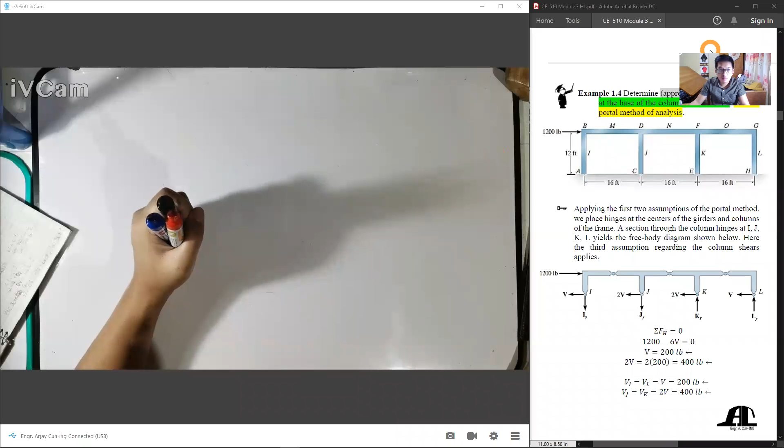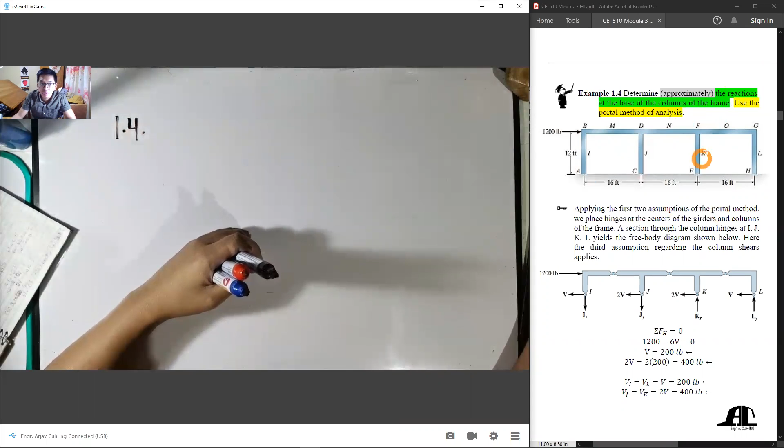So module 3 pa rin tayo. Okay, so this time sasagutan natin si example 1.4. Titignan nyo class, same, hindi, this time ang kukunin lang natin yung reactions nung given frame, yung portal frame method. So again, dating gawin, ang first step natin lagi dito is yung column shear.

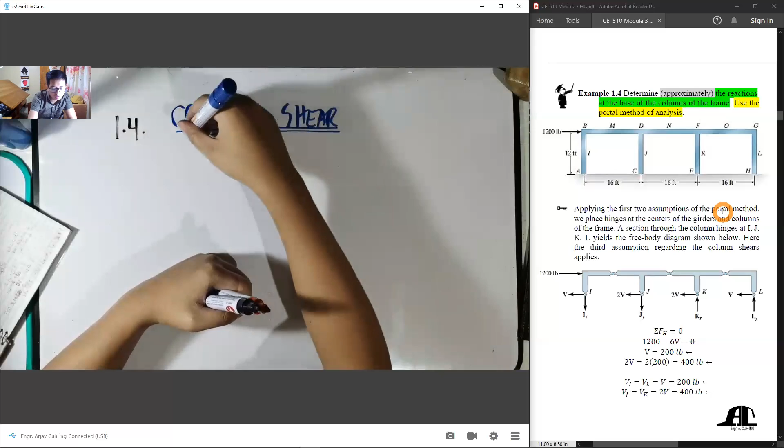So column shear, para mapalabas natin yung shear, kailangan natin ng cut. Ay hindi, ang cutting natin this time ay dito. Hindi, anywhere naman actually, kasi di ba ang habol lang naman natin pwedeng dyan, pwedeng dito. Ang habol natin dito is yung shear. Pero dito, this time, sa shortcut, more or less, cut na lang natin sa gitna.

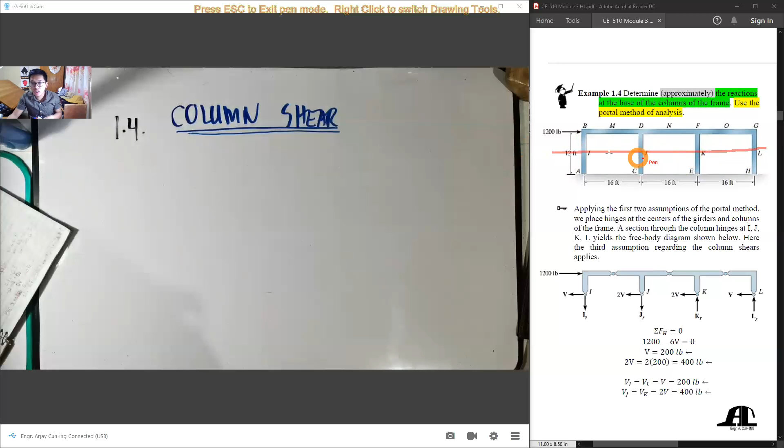Kumbaga kung saan yung mga internal hinge natin. So itsura ng ating working structure pag nag-cut tayo dyan. More or less, parang ganito. Yan, so meron tayong ganito. Dito yung internal hinge natin. Yan yung mga internal hinge natin. So kukunin natin yung shears dyan.

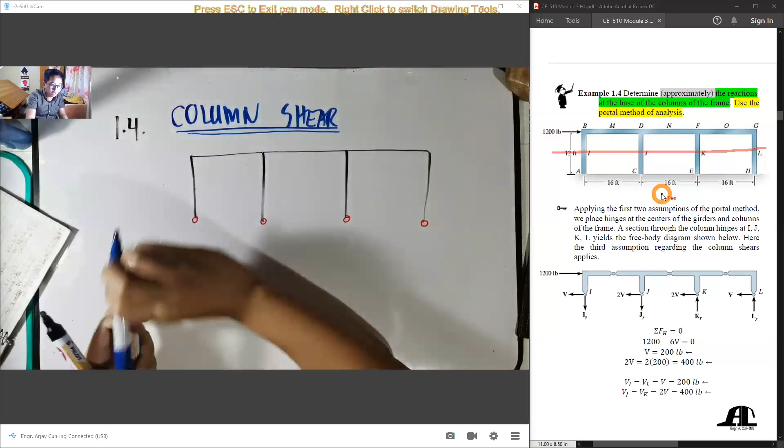So open muna natin yung external load. Ang external load natin, meron tayong 1200 pounds. Kung titingnan nyo, ilagay ko yung ating notation. So meron tayong B dito. Ito yung D, F, tapos G. Ito naman, meron tayong I, J, K, L.

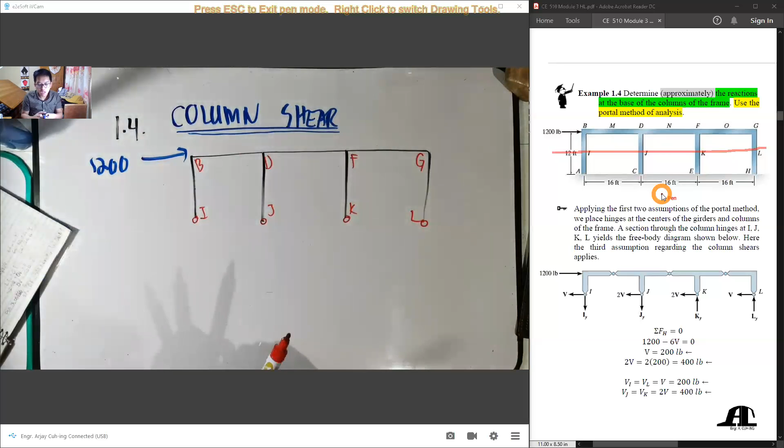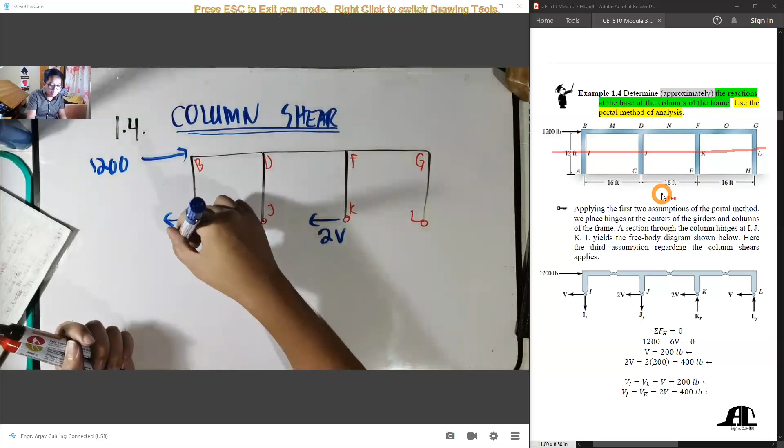Di ba yung first assumption natin, shear. So kailangan natin ilagay yung shear. Pag kinat natin yun, meron tayong makukuhang shear. Tapos yung mga value ng shear natin, pag interior columns, yung shear niya dito, 2V. Lahat ng interior columns may shear na 2V. Yung mga exterior columns naman, meron lang siyang V. Yan ang working structure natin.

Para makuha natin yung value ng V, magsasummation of forces horizontal tayo, equal to 0, lahat ang to the right positive. Apply natin yung formula. Meron tayong to the right na 1200, so positive siya. Minus, meron 2, 4, 5, 6. 6V is equal to 0. So may makuha tayong V: V is equal to 200 pounds.

Since nakuha natin yung V, pwede na rin natin makuha kung ano yung mga V dito. Kung titignan natin, meron tayong shear nung I. Yung shear nung I ay equal sa shear ng L, equal sa V, equal to 200 pounds to the left. Meron rin tayong shear nung J, equal sa shear ng K, equal sa 2V, equal sa 2 times yung 200, so 400 pounds to the left. Yun yung first step natin.

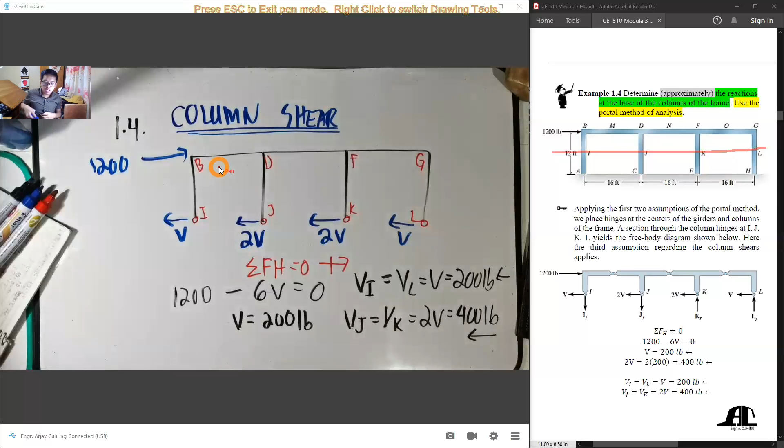Nakuha na natin yung column shear. So next step natin, kailangan natin free body diagram analysis. Lalagay lang natin yung mga sagot natin. Yung mga exterior, meron tayong 200. Yung mga interior, meron tayong 400. Okay, erase ko lang.

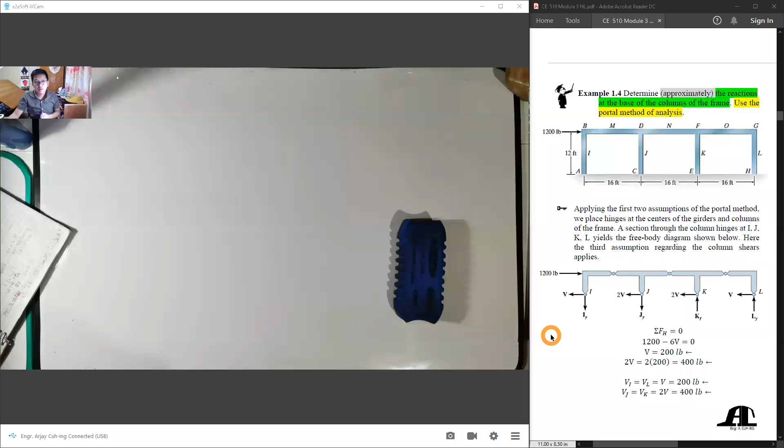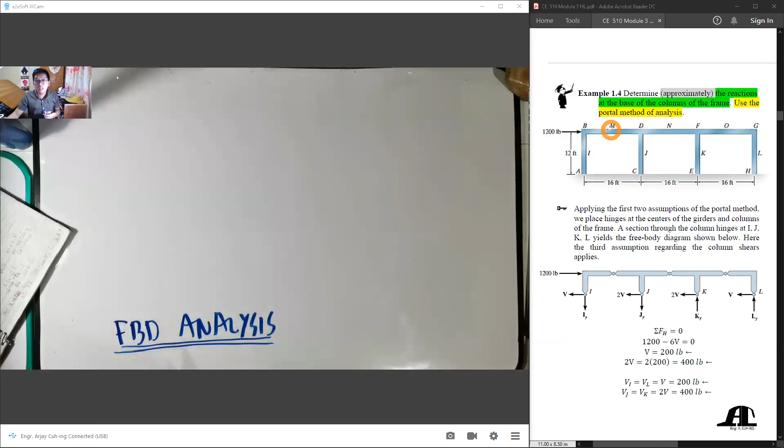Tuloy natin. So after natin makuha yung column shears, ang next step natin ay yung tinatawag natin free body diagram analysis. Itong free body diagram analysis, chop-chopin natin para makuha natin yung mga internal forces natin. Ang gagamitin natin is yung shortcut, kasi mas maiksi siya. Ang gagawin kasi pag shortcut, gamitin natin yung internal hinges.

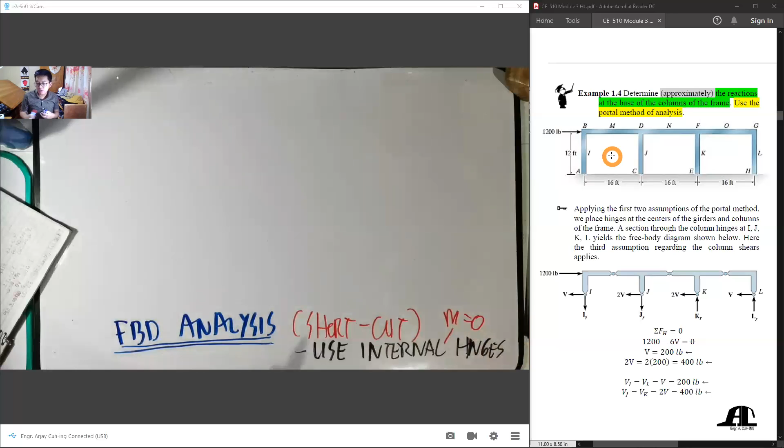Internal hinges. Ano bang special sa internal hinge? Pag internal hinge kasi, pag kinat mo, yung moment doon is equal to 0. Diba yan yung special pag internal hinge. I-drawing muna natin yan. Titignan nyo, meron tayong 1 story, tas 3 panels, 3 bays.

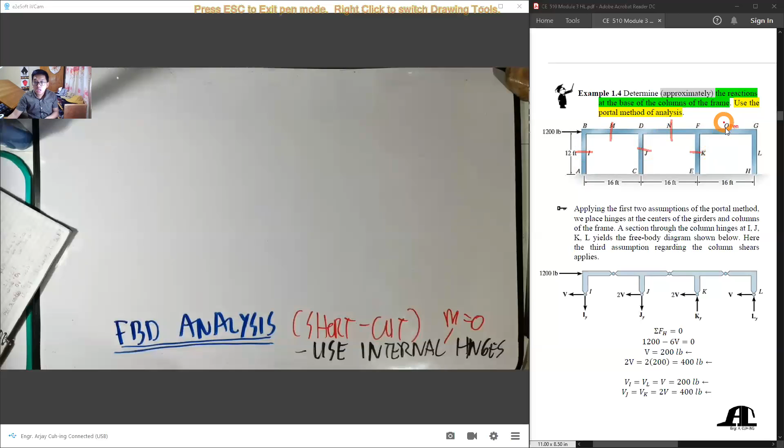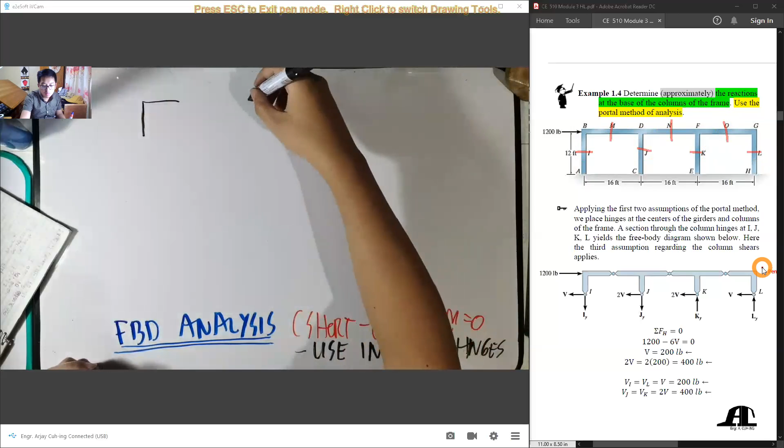Ang cutting natin dito ay i-cut natin dun sa internal hinge. Kung titignan nyo, cut natin doon, cut natin dito, cut, cut, cut, cut. Parang paghihiwalayin natin midway. Dito, meron tayong paganyan. Tapos meron tayong dito rin. Isa pa. Tapos meron tayong ganyan. Tapos i-cut rin natin dito. So may cut tayong ganyan.

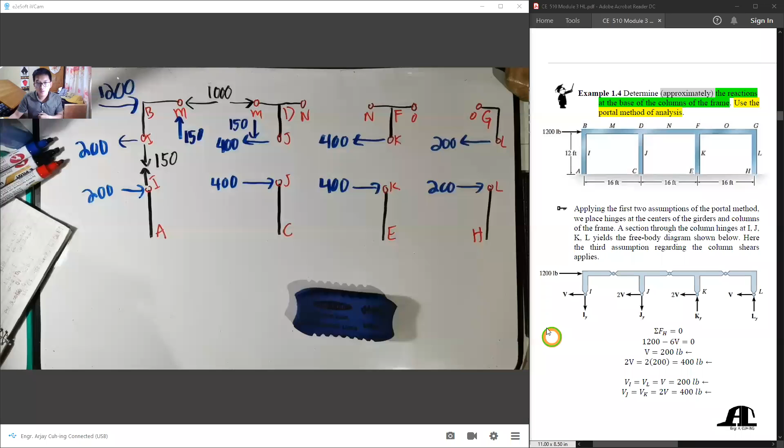So nagtapos na tayo dito, class. Kung titignan nyo, ang pwede nating next na i-analyze, class, is dito na tayo sa FBD ni D. Okay, erase ko lang to, class, para may space ulit tayo. So tuloy lang natin, class. So after nyo kung titignan nyo, class, so move na tayo dito. So ang next na i-analyze natin, class, is yung free body diagram ni D.

Okay, kung titignan nyo, class, ito na yung working structure natin. So ano yung mga unknowns, class? Meron na tayong shear doon, class, meron pa tayong axial. Okay, so yung dito, class, meron tayong axial, tapos meron rin tayong shear. Yan, gulo ba?

Okay, so ilagay lang natin, class, kung ano yung assumptions natin. Ito, class, i-assume natin na pababa. So ito, technically, class, yeah. Assume natin to the left. So ito, class, assume natin to the right.

Okay, so unahin natin class again. Working structure natin class again, yung FBD ni D. Okay, meron tayong 1, 2, 3 na unknown. So technically, gagamitin ulit natin kasi yung tatlong equilibrium equations. Unahin natin class, mag-moment na tayo sa n is equal to 0, ano clockwise, positive.

Okay, so ano yung forces class? Mag-create na mo with respect to n. Titignan natin class, meron lang tayo ng 150, no? So yung 150 na to class, times yung lever arm niya class is 8. Hindi pala 8 class kasi 8 plus, isa pang 8 plus 16. Okay, so 150 class times 16.

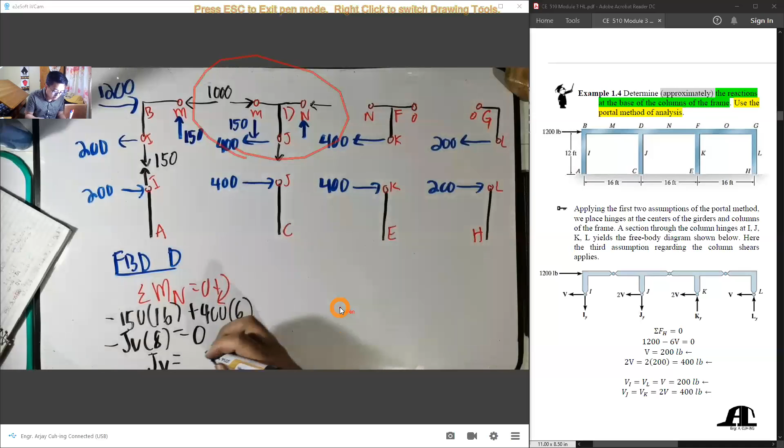Okay, so yung JV plus, pag kinalculate natin yung class is equal to 0. Titignan natin, 0 pala yun. So huwag na natin ilagay, alisin na natin siya kasi 0 naman siya.

Tuloy-tuloy lang tayo. Magsa-summation of forces vertical tayo kasi is equal to 0, lahat ng pataas positive. Kung titignan nyo, meron lang tayong 150, pababa siya, so negative. Tapos plus yung N vertical is equal to 0. Makuha natin N vertical is equal to 150 pounds. Tama yung assumption natin pataas.

Tapos summation of forces horizontal tayo is equal to 0 and to the right positive. Meron tayong 1,000 na to the right, so positive siya. Minus yung 400, minus yung N horizontal is equal to 0. So yung N horizontal natin is equal to 600 pounds. Tama yung assumption natin na to the left.

Ilagay na natin yung mga sagot natin. Meron tayong NV na 150, ito is 150. Tapos meron tayong 600, ito is 600.

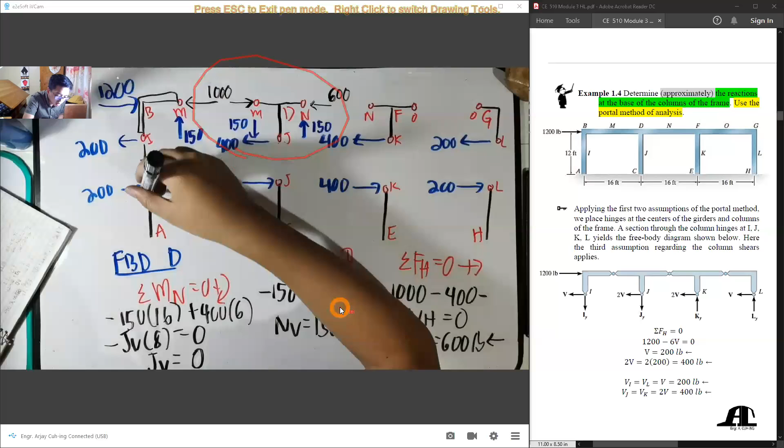Para mas ma-imagine natin, tabaan ko na lang to. Ganda palang ganito, para mas makita nyo yung structure natin. Nag-improve naman. Okay, ilipat natin yung mga sagot natin.

So meron tayong to the left na 600, meron tayong to the right na 600. Meron tayong upward na 150, so pag inipat natin magiging downward siya na 150. Tapos, yun na yun.

So gagalaw lang ulit tayo. Ang next na i-analyze natin is ito. I-erase ko lang ulit. Tuloy natin yung, ang i-analyze natin ngayon si FBD ni F.

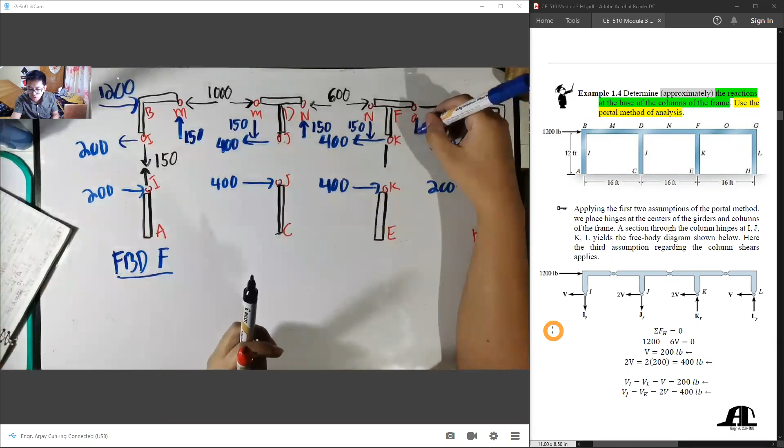Dating gawin tayo. Kung titignan natin, meron tayong tatlong unknown. Supposedly yung axial dito, tapos yung axial dun, tapos yung shear sa O. Maglagay tayo ng ating assumptions. Ito i-assume natin pa ganyan, ito i-assume natin pa ganito, ito i-assume natin downward. Okay, 1, 2, 3.

Dating gawin, summation of moments natin dun muna sa O is equal to 0, lahat ng clockwise positive. Yung forces na mag-create ng moment with respect to O, meron tayo ng 400 times yung lever arm na 6, minus yung 150 times lever arm na 16, minus yung kinukuha natin, so kukunin natin dito yung K vertical times yung 8 is equal to 0.

Makukuha natin yung K vertical equal to 0 rin siya. Titignan nyo kasi, tanggalin na natin siya kasi 0 naman siya.

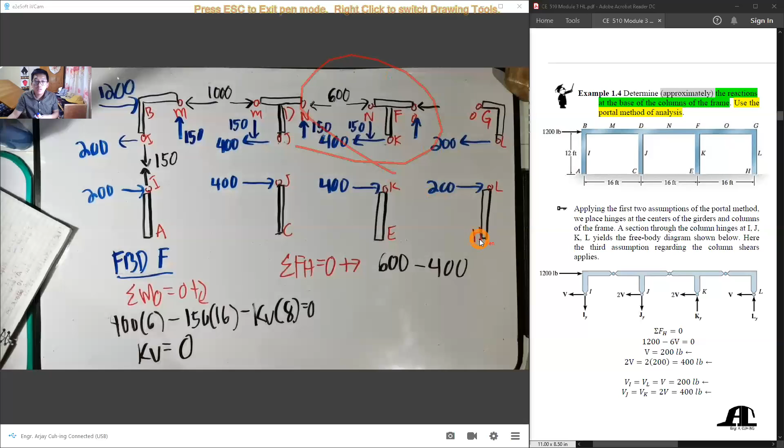Pounds. So may assumption natin to the left. Lastly, summation of forces vertical is equal to 0, pataas positive. Yung working structure natin, meron lang tayong pababang 150, so negative, plus yung upward natin na O vertical is equal to 0. Makuha natin yung O vertical is equal to 150 pounds. Tama yung assumption natin pataas.

Lagyan natin yung mga sagot natin. Ito still 150 siya, tapos yung axial natin naging 200. Lipat natin yung mga sagot natin, meron tayong to the left na 200, so dapat pa right na siya. Meron tayong upward na 150, so dito meron tayong downward na 150.

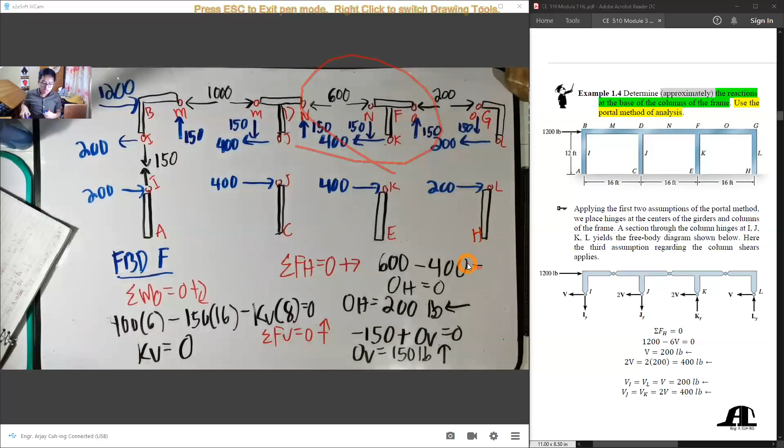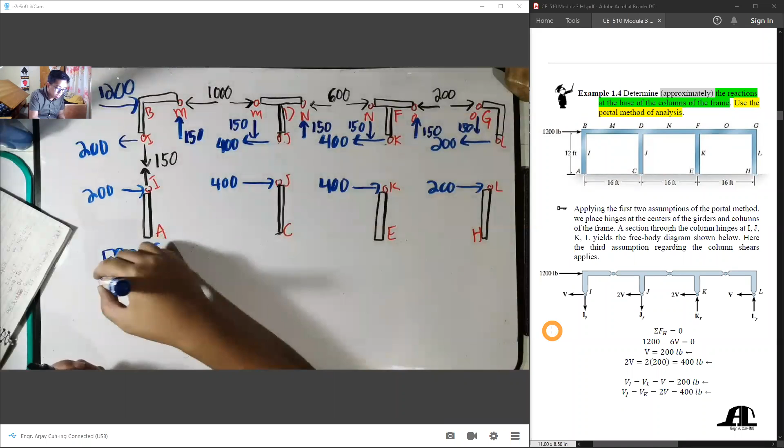Okay, so ganun, tuloy lang natin. Next up i-analyze natin FBD ng G. So FBD ng G, i-erase ko lang ulit. Dito na tayo, free body diagram ng G. Ang FBD ng G, kung titignan yung isa lang yung kukunin natin dito, kukunin lang natin kung ano yung axial dito sa L.

Kung titignan nyo, ang gagawin lang natin dito, ang summation of forces vertical is equal to 0, pataas positive. Meron lang tayo plus 150 na pababa, so negative, plus yung, ito i-assume na natin sa pataas siya. L vertical is equal to 0, so L vertical is equal to 150 pounds. Tama yung assumption natin pataas. Next, dito na tayo sa mga columns natin sa baba kasi nakuha na natin lahat ng forces dun. Ilagay mo natin yung sagot, ito is equal to 150.

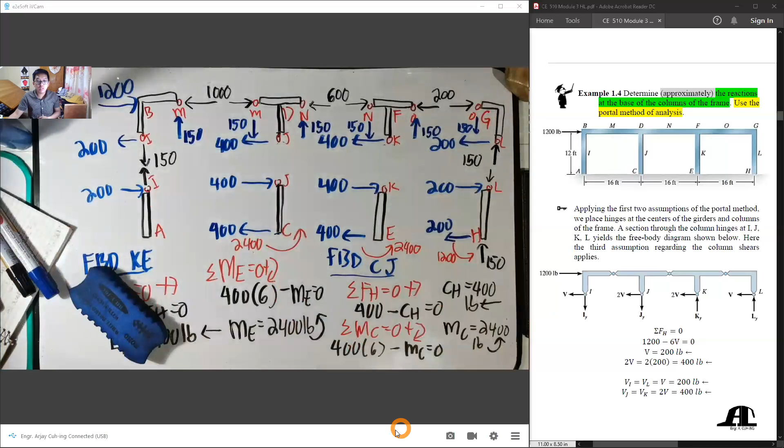So, tuloy natin class. Ang kailangan lang natin kunin class is yung FBD ni AI. Dating gawin class, titignan nyo ang kailangan lang natin kunin dito sa tatlo class. Meron tayo ng action, so assume natin pag ganyan class. Meron tayo ng yung shear, yung axial class, tapos yung moment. I-assume natin class yung moment natin pag ganyan.

Unahin na natin class yung summation of forces horizontal is equal to 0, to the right positive, para makuha natin class yung horizontal sa A. Titignan nyo kasi meron tayong 200 minus yung horizontal sa A class is equal to 0. Makuha natin yung horizontal sa A is equal to 200 pounds. Tama yung assumption natin class, to the left.

Summation of forces vertical tayo is equal to 0 at pataas positive class para makuha natin yung vertical sa A. Titignan nyo kasi meron tayong pataas na 150 minus class yung vertical sa A is equal to 0. Makuha natin kasi yung vertical sa A, 150 pounds. Tama yung assumption natin class, pababa.

Lastly class, magmo-moment tayo sa A is equal to 0, clockwise positive, para makuha yung moment sa A. Ano yung forces mag-create ng moment class with respect to A? Meron tayong 200 class times yung lever arm ng 6 minus class yung moment sa A is equal to 0. Makukuha na natin class yung moment sa A is equal to 1,200 pound-foot.

Tapos class, counter. Okay, ilalagay natin yung mga sagot natin class. Ito is 1,200. Ito class is 200. Tapos ito class is 150.

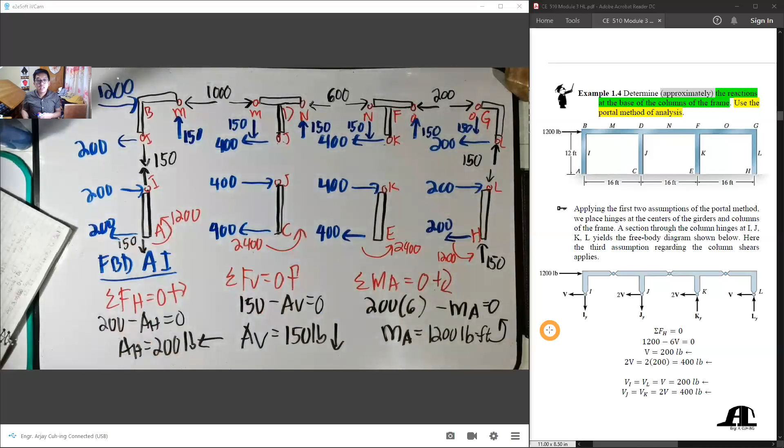Ang tutukusin class, yan yung mga answers natin. Ito na yung final answers natin, di ba? Kasi ang gusto ng problem class, ano yung reaction? Realize nyo lang class ko, ano yung mga nandito class? Yan na rin yung reactions natin.

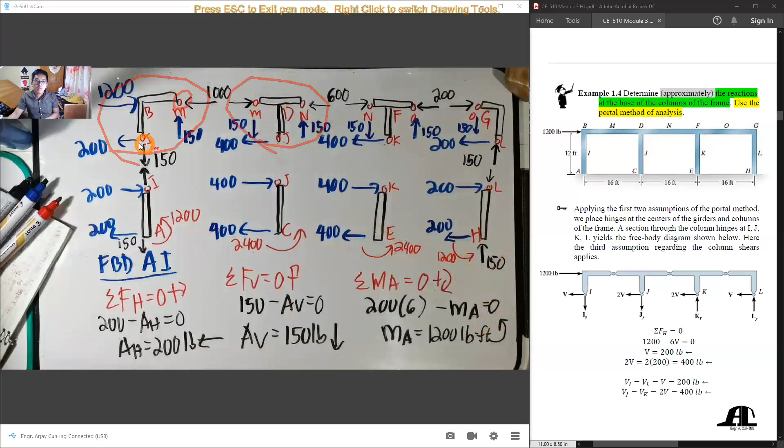Gets ba? Okay, kung titignan nyo class, baka tanong nyo, paano sir pag tinanong sa problem, ano yung moments din? Member end moments. Kung titignan nyo kasi class yung ginawa natin, di ba wala tayong member end moments? Kasi nga class kinat natin sa inflection points. Paano natin makukuha yung mga member end moments?

Baka sabihin nyo, class, kailangan natin i-analyze yung member. Hindi ganun, class. Kasi kung titignan nyo, class, meron tayong formula. Di ba may formula tayo, class, ng member end moments. Kung titignan nyo, class, ito yung given formula ng member end moments natin, class. Actually, ito class nag-work siya sa shear, sa member, sa column tsaka sa beam.

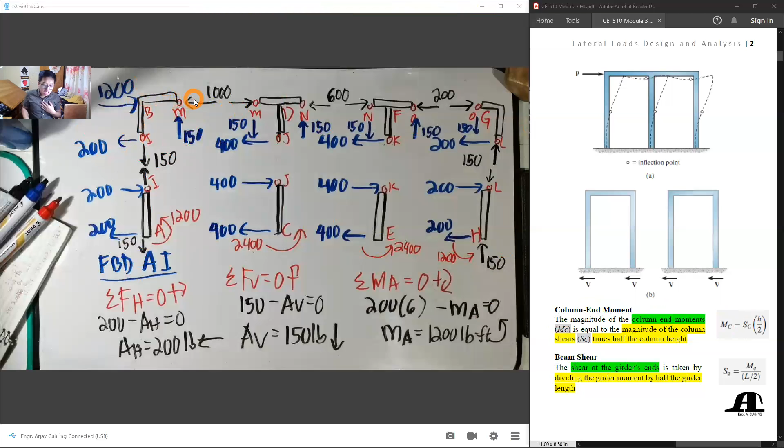Okay, ang gagawin lang natin class, kukunin natin yung shear times class yung half nung ano. Madaling sabi class, kung titignan mo, kukunin mo lang para makuha mo yung moment dito class sa BI or sa BA. Para makuha yung moment sa BA class, yung 200 na to times yung distance na yun. Para makuha mo kasi yung moment sa BM, yung 150 na to class times yung distance na yun. Kunin na lang rin natin yun class for the sake.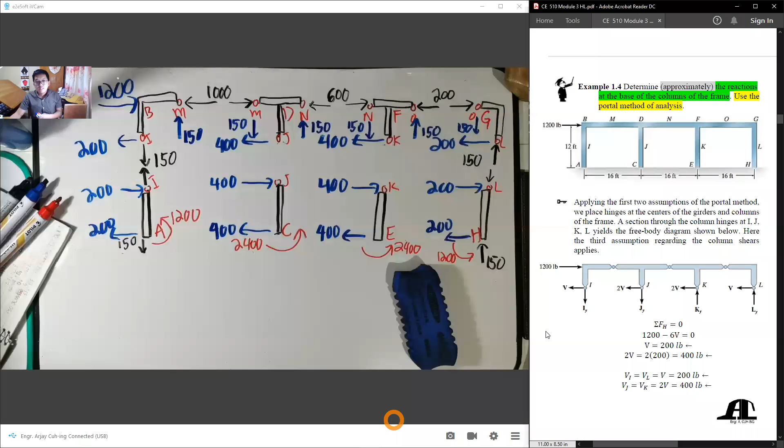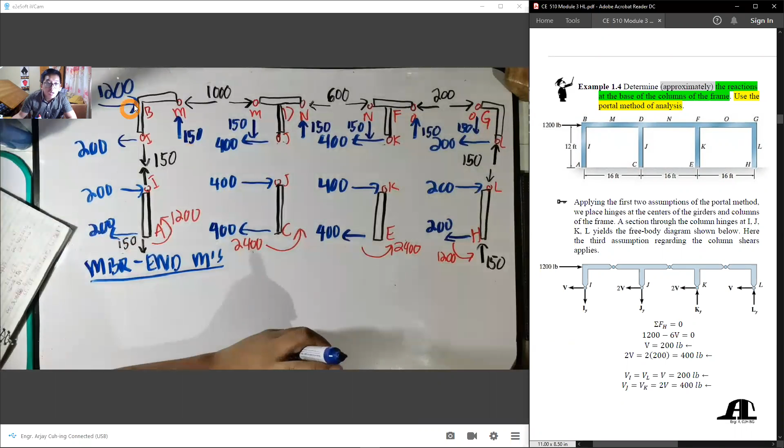Again, ibalik ko lang dun sa problem natin. I-erase ko muna class. Again, this time class, ang kukunin natin class is yung member end moments. Ang gagawin lang dito class again, ang gagawin lang natin class is parang imagine nyo may moments tayo dito. Ito class. Yan. May moment tayo dyan.

Tapos kung ano yung orientation niya kasi ganyan. Para ang ginagawa natin class, kunin class yung nandito. Kukunin natin class yung moment BA. Kunin natin yung nandun class. I-analyze lang natin yung class. I-isolate lang natin yan. Kung titignan nyo class, ang analysis natin, yan, di ba? Ito class yung B.

Ito yung I. Para makuha natin class yung moment sa BA, cut natin doon. Di ba meron tayong internal hinge dito class, tapos meron tayong shear. 200. Titignan nyo class, ito i-assume natin na ganyan. Para makuha natin class yung moment sa BA, magmomoment lang tayo sa B. Magsasummation tayo sa moment sa B is equal to 0 ang clockwise positive. Titignan nyo class, may makuha na natin class yung moment sa BA.